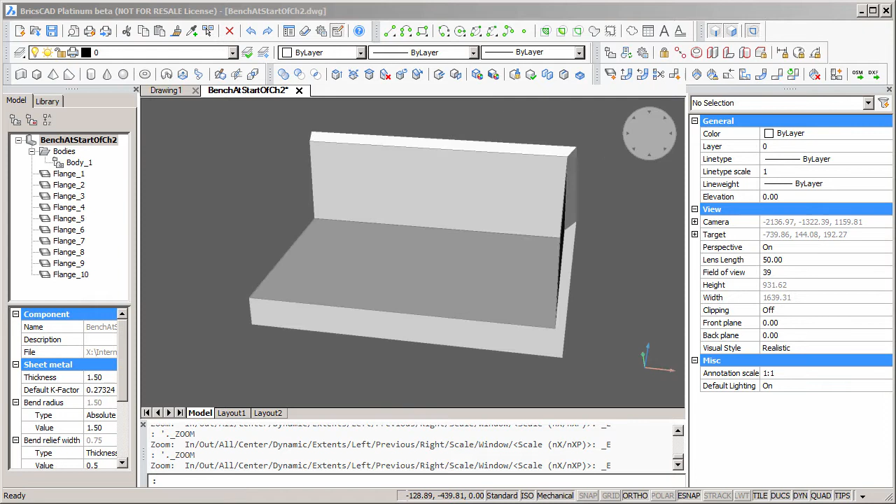Hi, I'm Damien Harkin. This is a series about modelling a sheet metal bench top, such as you might find in a commercial kitchen. Our bench has splashbacks at the back and on the right hand side. In Chapter 1, we'll model the geometry of the bench.

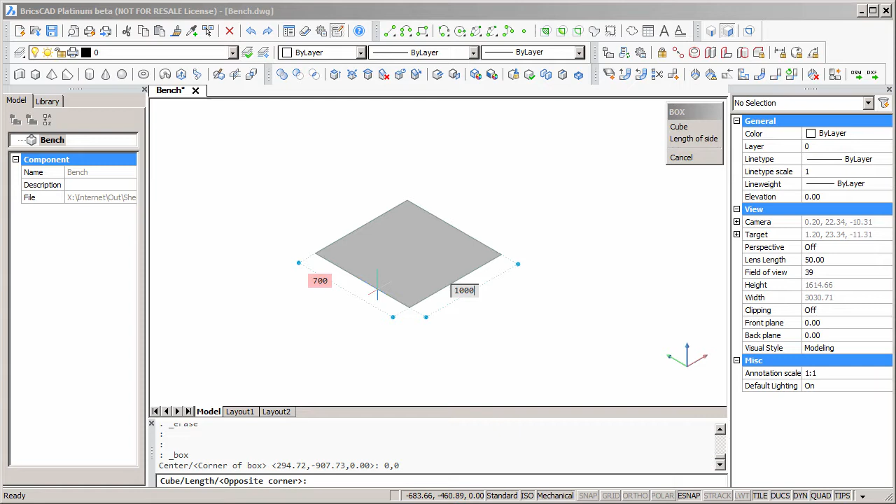Let's start with the box command to form the actual bench top. We'll make the bench 700mm deep from front to back, 1000mm wide from left to right, and 100mm thick from top to bottom. It's good to keep it quite small while initially creating it, but this bench will be parametric and we'll be able to change the length and width to any numbers we like.

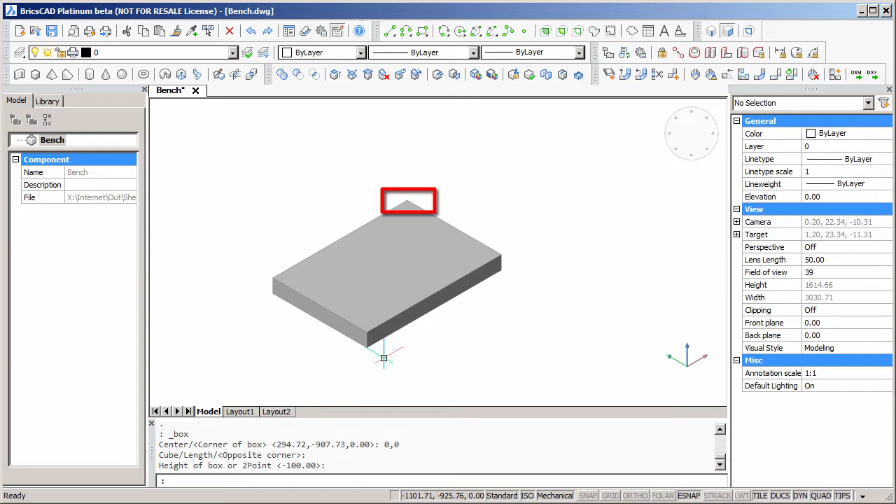I've drawn this box starting at the back, top, right corner of the bench. That's where the splashbacks will join, and that's the point where we would hold the bench when placing it into the corner of a room.

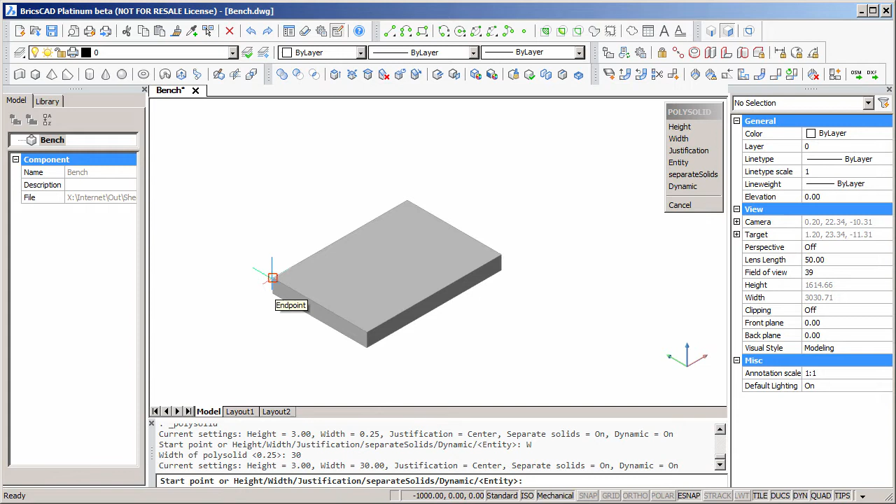Now we'll use the polysolid command to form the splashbacks. Let's set the width of the polysolid to 30mm. We can use an endpoint snap to pick up the corners of the box.

Use a right click to finish placing the baseline. Now we can use the Control key to toggle the alignment of the polysolid. We will place the polysolid inside the line that we drew. Then to finish the polysolid command, we can set the height of the splashback to, say, 350.

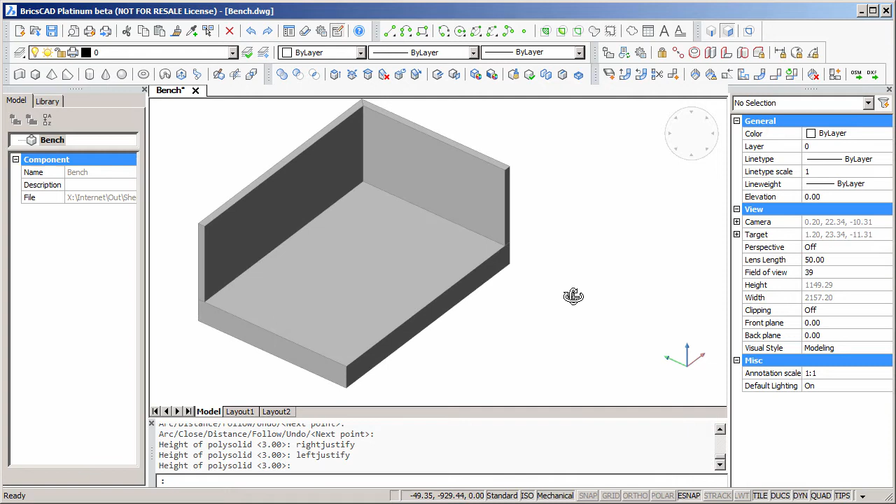Now notice that the polysolid command has created two separate solids with a neat miter joint between them. We need them to be two separate solids because we're going to separately rotate the top surfaces. We don't want the cook to use the top of the splashback as a shelf.

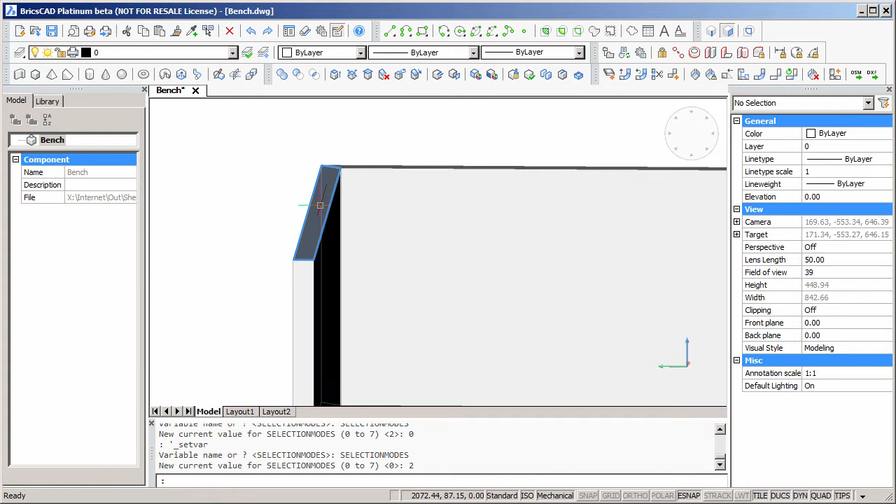We'll set selection modes to select faces. Hover over the top of the splashback and select the rotate command from the quad. We'll rotate this surface around the axis of the back edge.

The reference point can be a point on the front edge. We'll rotate the surface down 45 degrees. Now we'll spin the model around and do the same for the second splashback.

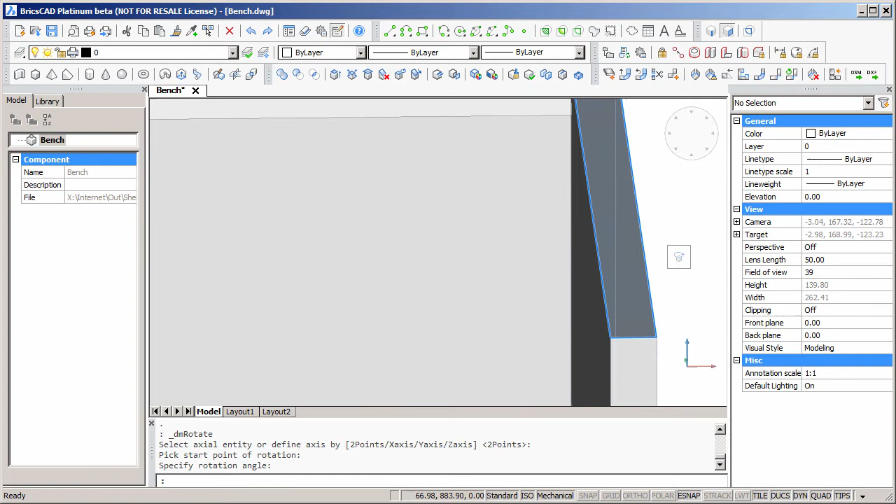Now we have the correct shape for our bench with splashbacks. We can union these three solids into one solid. Select them all and we'll select the union command from the editing toolbar.

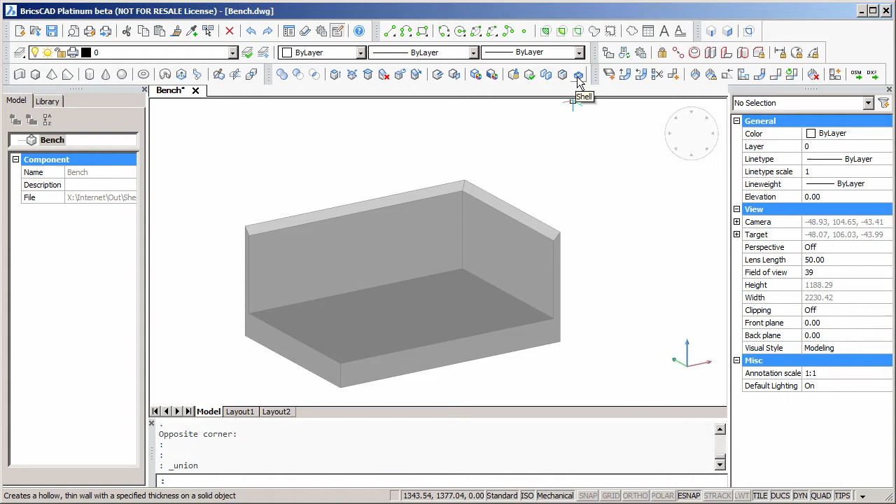Let's hollow out the model. Select the Solid Editing Shell command. This command can remove surfaces, but for now we will keep all the surfaces. Set the shell thickness to 1.5mm.

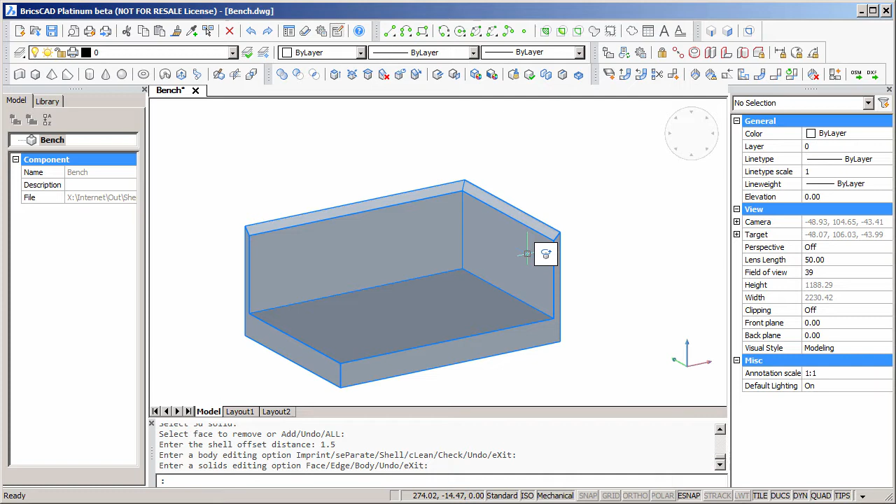Now we don't want a full back on these splashbacks, we just want a lip at the top. So we're going to cut holes into the back of the model. We need to cut away most of the bottom of the bench as well. We're going to leave a 30mm lip around the front edge of the bench. I'll use the offset command to start this rectangle.

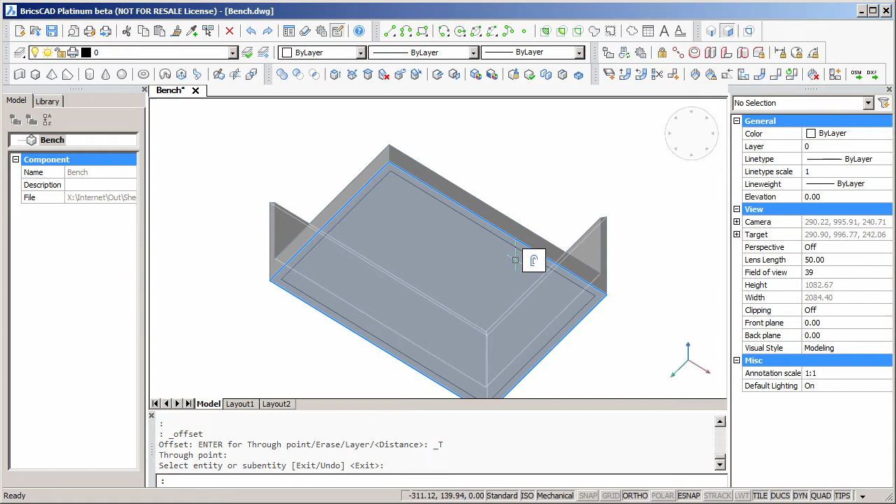Hovering over the rectangle, we can extrude it out to form a solid, or inwards to cut away our model. I'll extrude it 10mm up into the model to cut away the base, but not the top surface of the workbench.

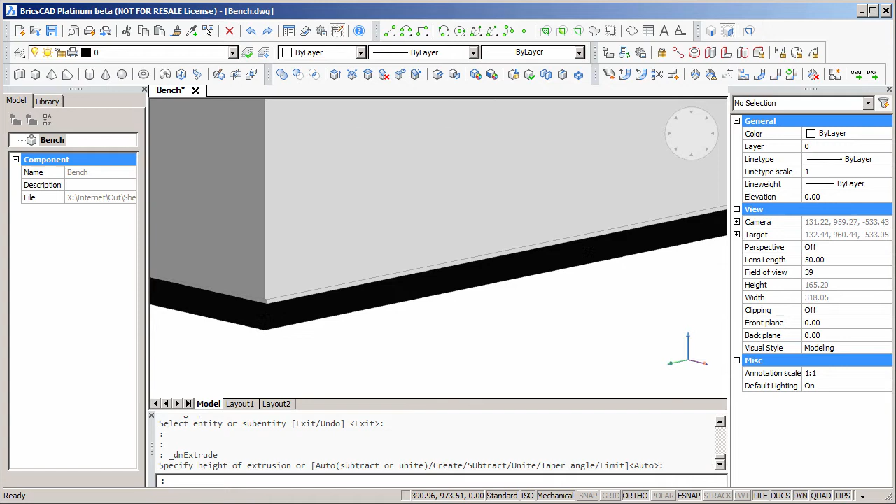Now we'll use the push-pull command to push the edge of this flange back flush with the inside face of the wall of the bench. When we press the Tab key, we can change the target of the dynamic dimension, so we can set the dimension between the edge of this flange and the inside face to 0.

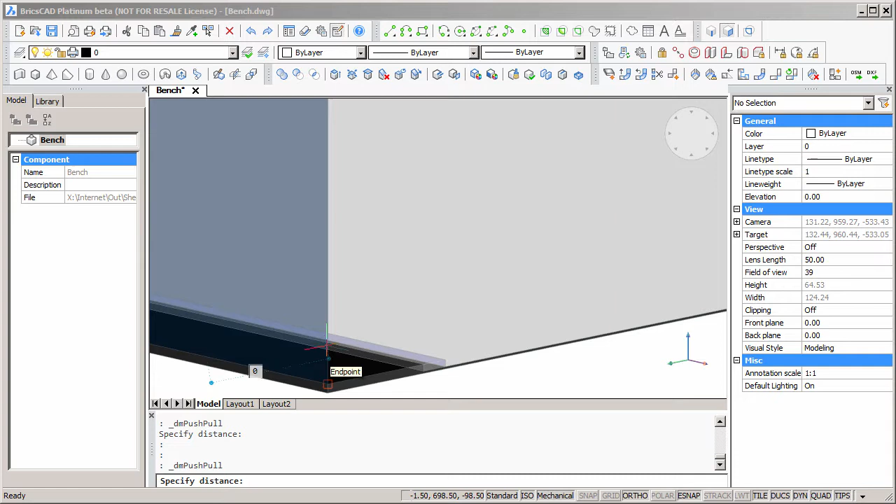Let's save the model now. Now I'll spin it around and I can draw a rectangle. Because dynamic UCS is turned on, I can draw a rectangle directly on the face of the back of the model.

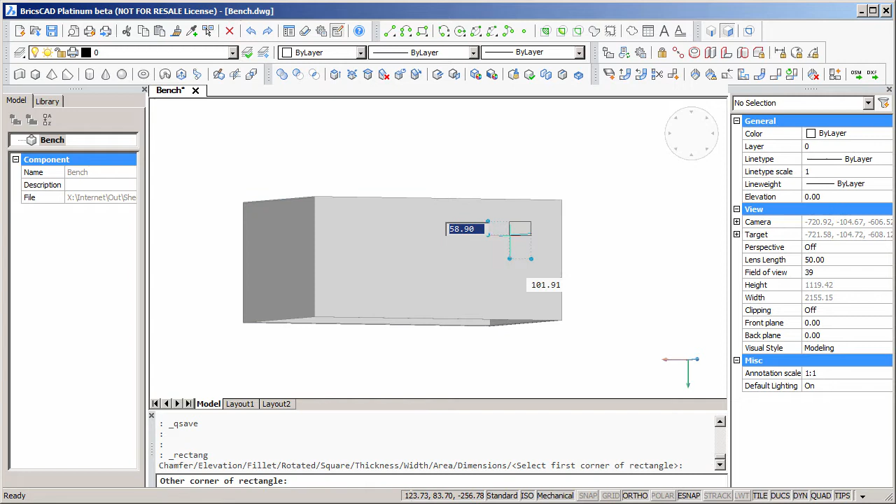Start the extrude command, push into the model, type in 10 and press enter. Now we'll clean up this cut using the push-pull command to force it flush with the face of the inside of the model.

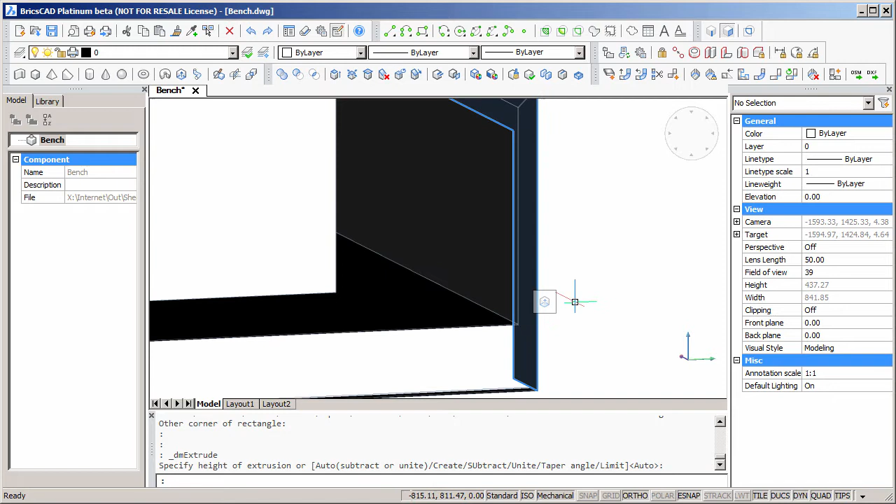Again, we use the Tab key to move the dynamic dimension so that it's pointing to that inside face, and type in 0. We'll use the same technique on the back of the side splashback to clean that up as well.

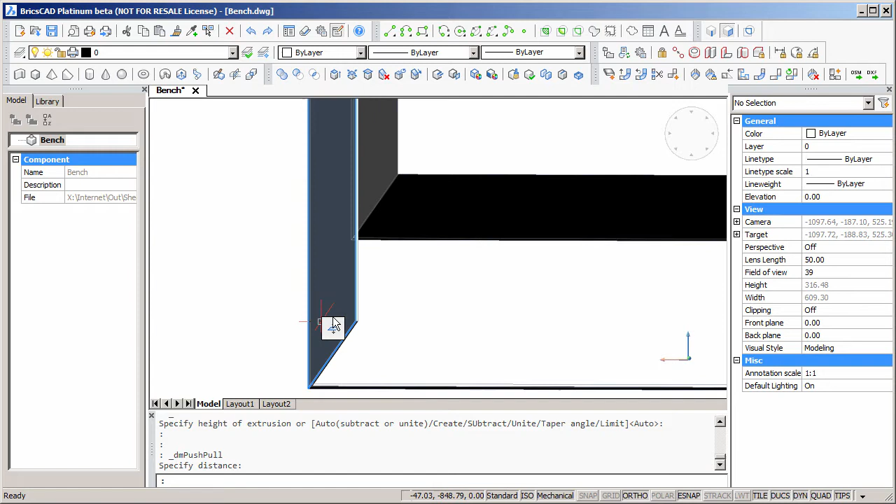We have one more chore to do to clean up this geometry at the back. We're going to raise up the skirt around the back so that it's level with the kink in the front of the splashback. We can just snap to that point.

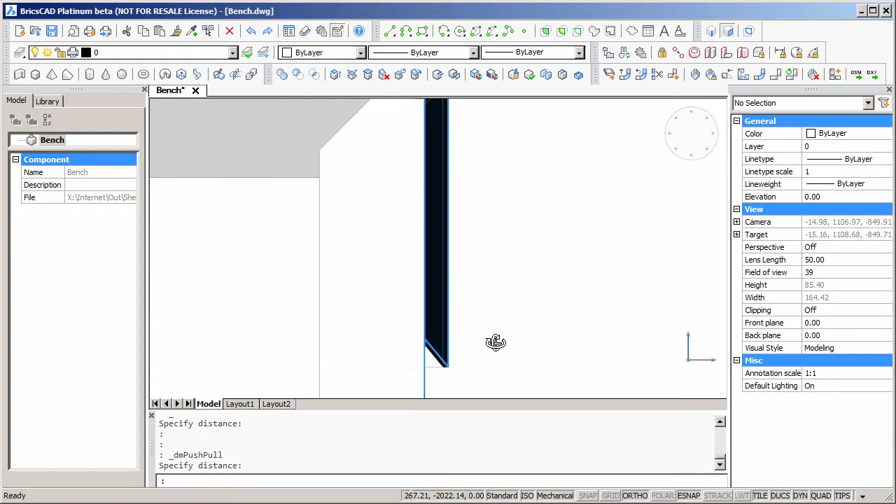Now we're dealing with very small surfaces, 1.5mm thick, on a relatively big model, so sometimes it's a bit tricky to get an appropriate view where you can see what you're trying to do. So bingo, that looks pretty much like the model we're trying to create. So we'll save the work now.

Up till now, our model is a dumb solid. It doesn't know that it's meant to be sheet metal. But now we will use SMCONVERT to convert the model to sheet metal. This will maintain the thickness of all of the flanges.

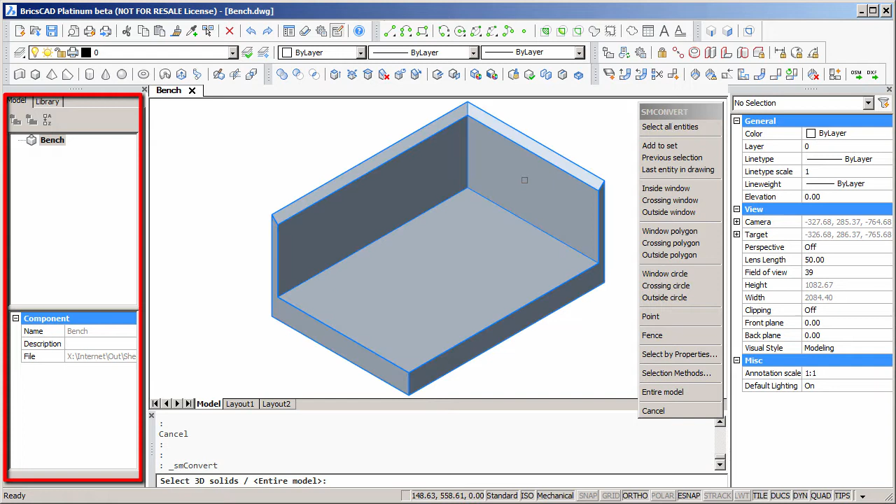If we look at the mechanical browser, we can see initially there's nothing there, but when we run the SMCONVERT command, suddenly we have sheet metal flanges recognised by the system. So we'll save the model at this stage, and that's really the end of chapter 1 of making a sheet metal workbench.